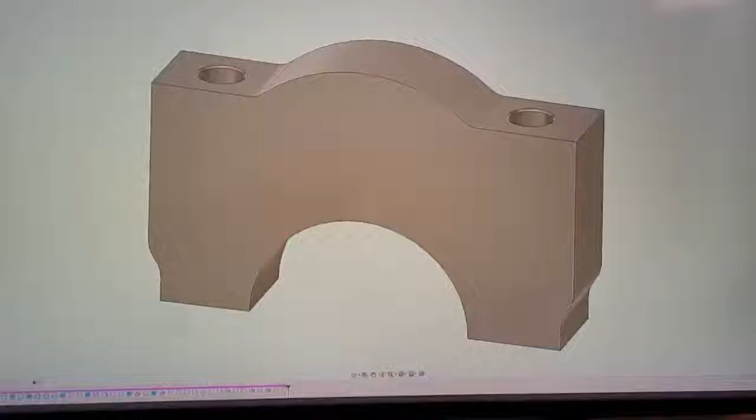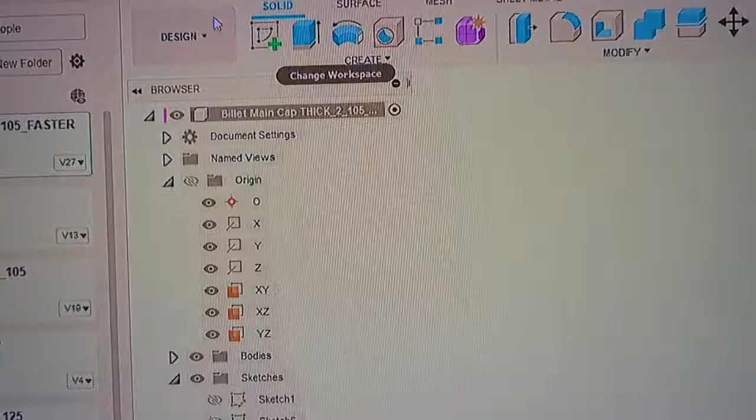Today I'm going to show you some more of how we're going to do the manufacturing. So I'd mentioned I use Fusion 360. Oh, little thing popped away. So in here, this is Fusion 360. When I go here, you'll see we have options. We can design, we can do manufacture. We're going back and forth between these two. So we'll come up with a good design and then we'll figure out how to manufacture it. So let me show you what that looks like.

Oh my God, why is this thing doing that? All right, I guess when it goes slow, it doesn't like it. I always do that quick and I don't.

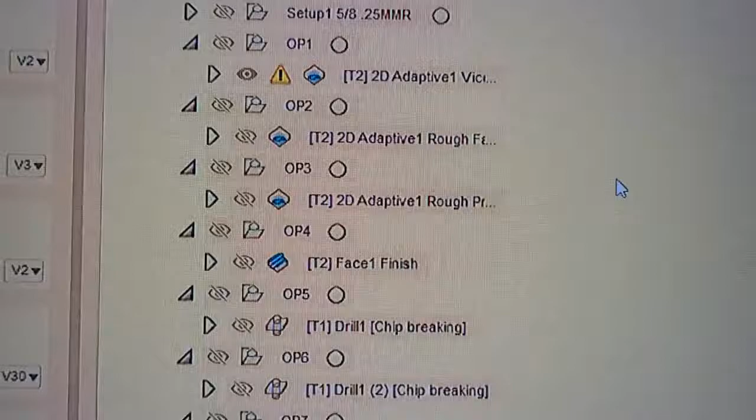Anyway, so this is what we ended up with. I'll show you. So it starts off, ignore some of that junk up there. So you see op 1, that's where our new stuff starts. We got 2, 3, 4, and then it goes all the way down to the very last one, which is 13. We did all kinds of stuff here that's new and better that I've never done before. So one of the big ones is, let me show you.

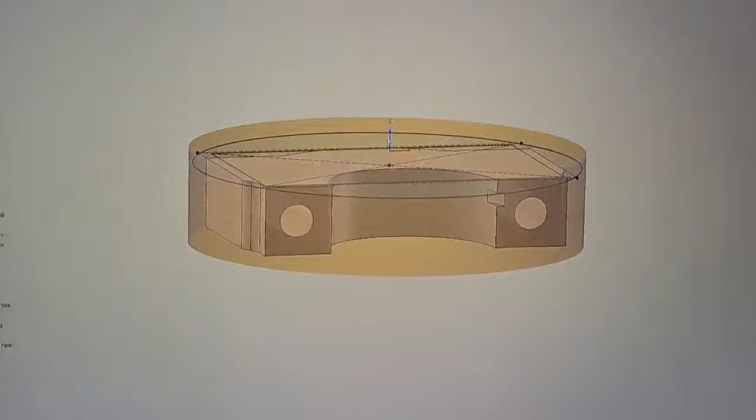I'm gonna go to op 1 and I'm gonna click it. And what you're going to see is there's a big round piece of metal. This is what we purchase. This is the metal as it comes. It's just a big round disc. It's like 5 inches in diameter and it's about 1.25 inches thick, roughly.

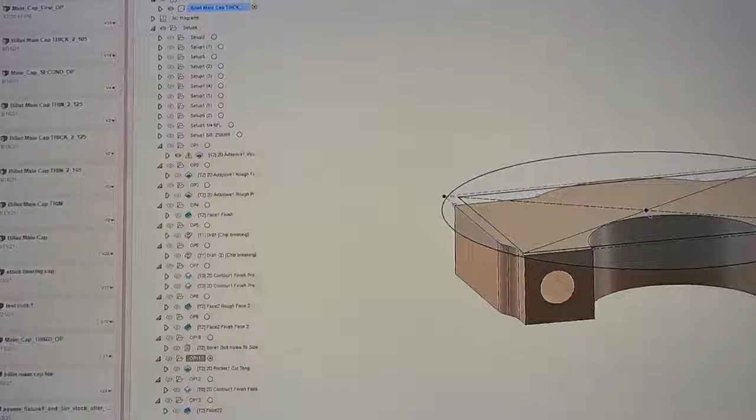Those are approximate numbers. So what you'll note is when I go to operation 2, look at this now. See how it still shows that round piece of metal, but now it's got a rectangle cut in it? I've never done this in Fusion, but what we did was we made it carry. When we go to op 2, it remembers, it starts with whatever was in op 1 and it sees that we cut some metal away and it uses that as the setup for op 2.

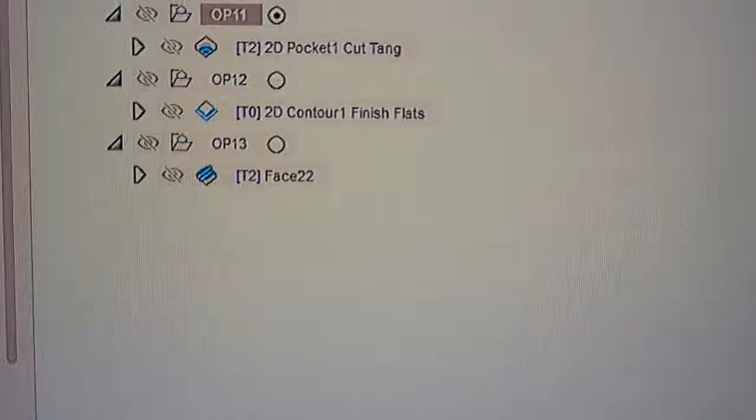And as you work your way down, when you get to op 3, it uses whatever has been accomplished for the operations above it and so forth. So by the time I get to the end, this is what I'm actually going to end up with. Now this might seem intuitive, people are watching this video going, well duh, of course you do it that way, but I've never done it this way. What I've always done is I would just have different setups, all based off of the same stock, or I would have different parts. Crazy stuff. And this is the first time I've ever done it this way.

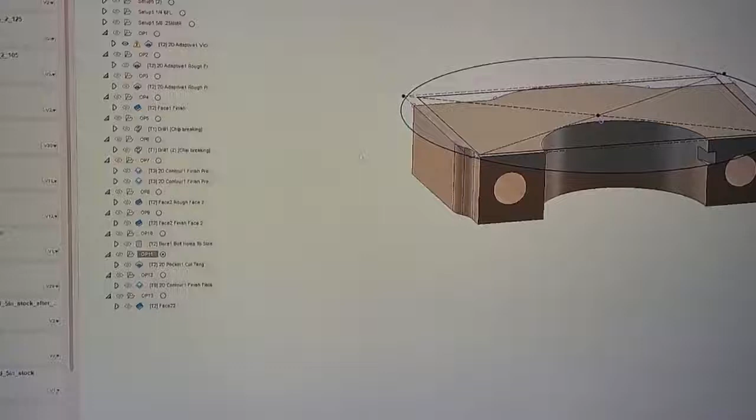I don't know how to stress how important this is. This is extremely important. And if you've never done this, or you don't make parts, it may not even seem obvious why this would matter. But what this means is that when I get down here to this last op, and you see what this part looks like, this is what it's actually going to look like. It's not assuming anything. If this is true, then this is what you'll end up with. That's why that's pretty cool.

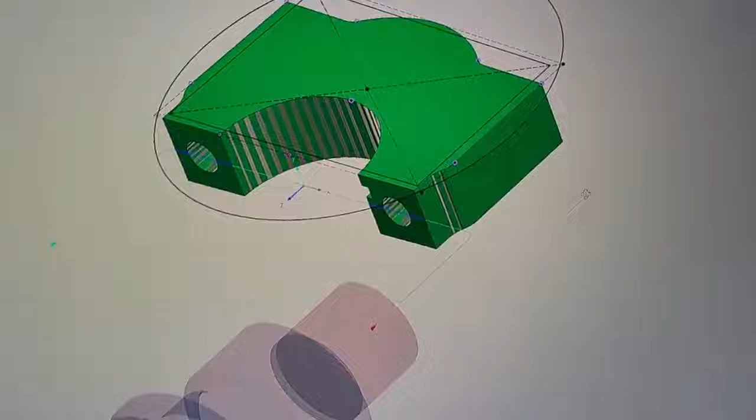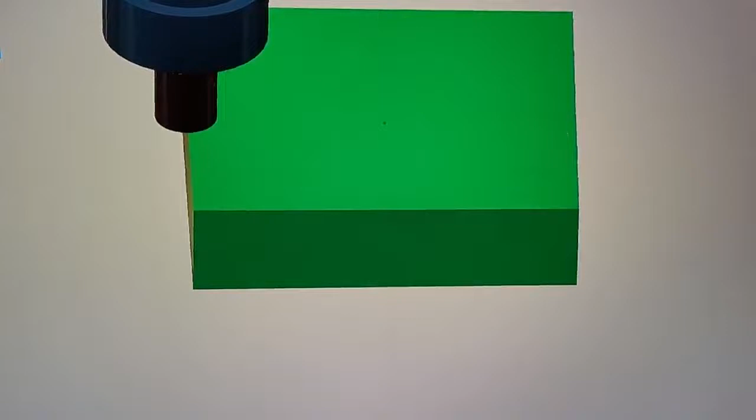So I'll show you. Anyway, here's our first operation. So we take that round piece of metal, and you can see all these blue lines. It just goes around and cuts a lot of that off, and you end up with this. I don't know if I've ever shown this on video, but this software can actually do simulations. Now, I don't know why the stock shows up as a square here. This software is just goofy sometimes, but I promise you it's actually a round piece of metal. But this is what it's going to do essentially on the machine. Little cutter is going to go around and follow its toolpath, and as you can see, it's cutting that rectangle.

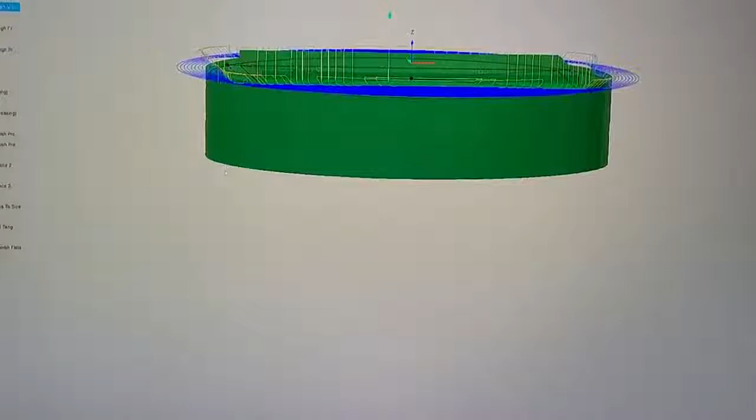There we go. And I'll show you some of the detail that went into this that may not be obvious now, but you ever heard that phrase, pay now or pay later? That's kind of how this stuff goes. The better of a job you do up front, the better your parts will be in the end. So you see this little radius? It's kind of hard to get to show up. You can see that's kind of curved. That's because our tool has a radius on it.

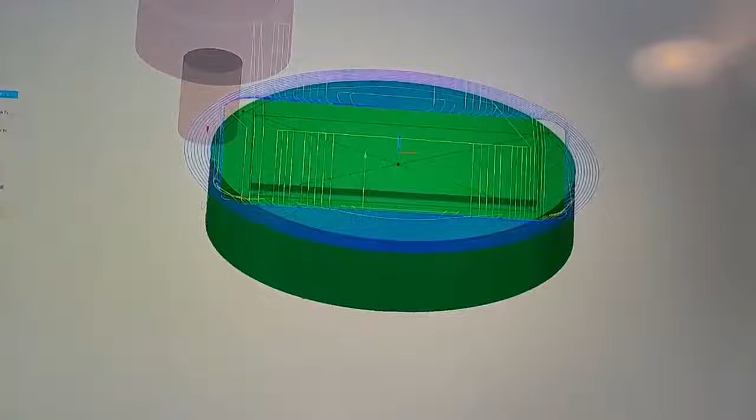This is the first time I've ever modeled that in software, put a radius on a tool, because either I don't use those tools, or if I do use them, I just ignore it. But that actually matters, and I've paid for this so many times in the past where something that I modeled, and then I went and machined it and it didn't turn out right because that radius somehow screwed me up.

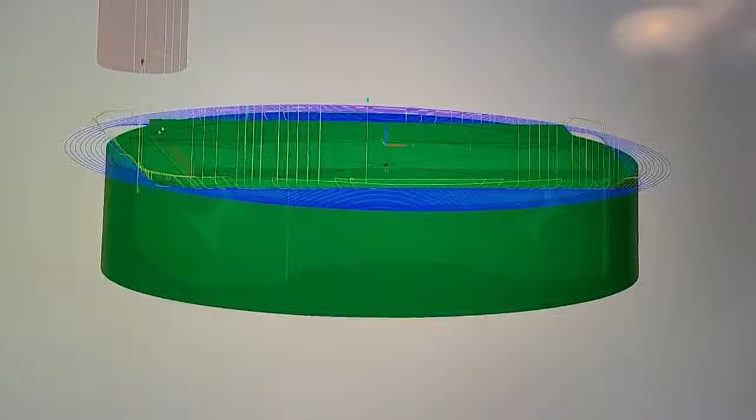So this time we put it in there, and sure enough, I've bumped into this issue several times where operations that look like they worked now don't work, and I'd have to go back and modify so you cut that metal off that the radius left behind. Again, there's like 1,000 little things that'll get you on this. So keep that in mind, guys.

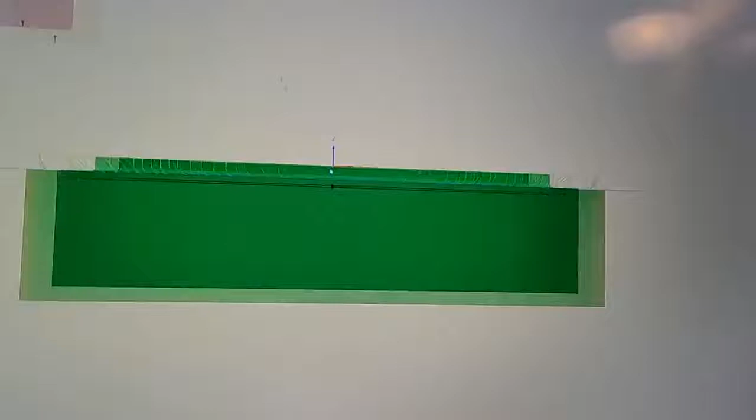I'm not really an expert at this. I'm kind of stumbling my way. You know, I do have some experience, but I am stumbling my way through some of this. It's a lot to take in. Not to mention the fact that, you know, I designed all this and I got to make it work on my machine. But yeah, we went through this step by step.

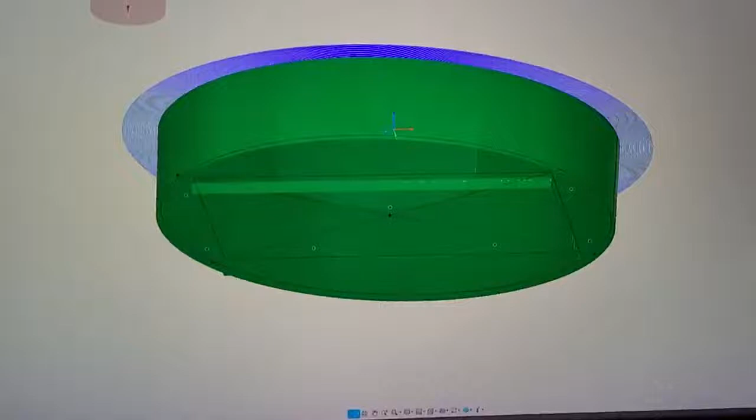So here's our second op. You can see everything's flipped. Now we're grabbing it in that rectangle. So basically, here's the bottom of the part. You can see that flange we just cut on there. That gets clamped down in a vise. And now you just got this round piece of metal poking up. And then essentially it just goes around in a circle and machines that whole face down to some level.

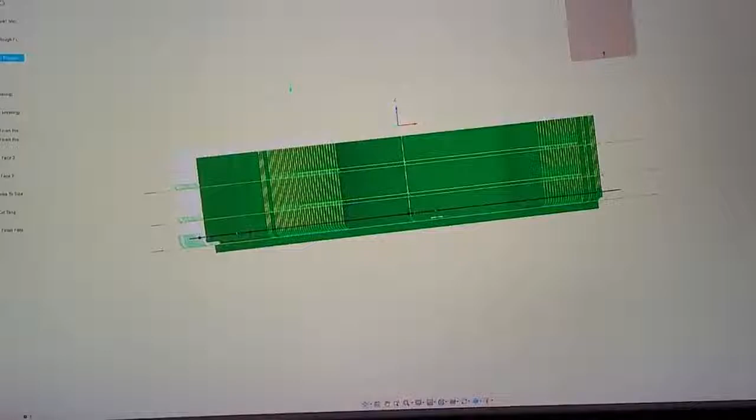Then the next operation, still clamped in the vise, it goes around and cuts this profile. And you can see here it's actually doing that in 3 stages. This was 4 stages for so long. It took a ton of optimization to figure out a way to get that to be done in 3 instead of 4. But hey, doing it in 3 instead of 4 makes it faster, and that's why we did it, but a lot of work. It's crazy. You just see this and you're like, oh yeah, whatever. But man, hours and hours, guys.

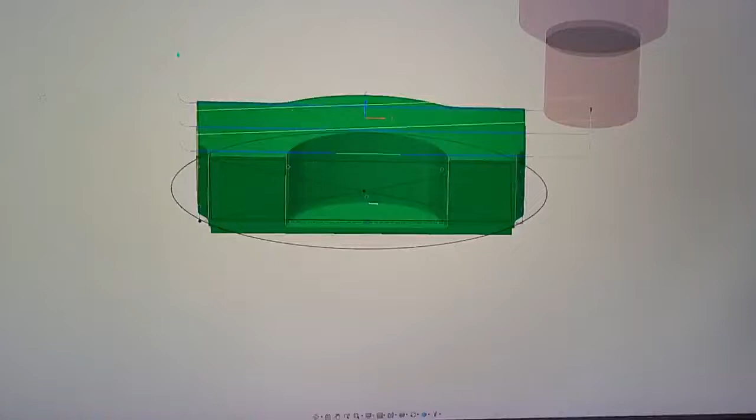Then we do a facing op. This brings this surface down to final size. So basically before, when we did our roughing, we got it pretty close, but we didn't get it all the way. And when we do the facing, that takes that last little skim coat off and gets it down to size. Then we've got some drilling operations.

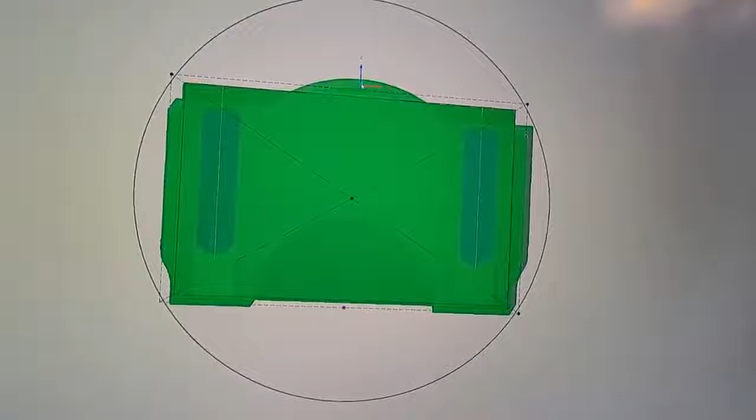You notice we keep changing this little thing. That's your datum, your XYZ. That's what's considered 0. I'll have a whole other discussion about that in a little bit. But you'll note every time I keep changing setups, you'll see that move. So in this operation, you can see some drill holes. We're just popping a hole there and there. And if you see, it doesn't even go all the way through. We're using a shorter drill bit.

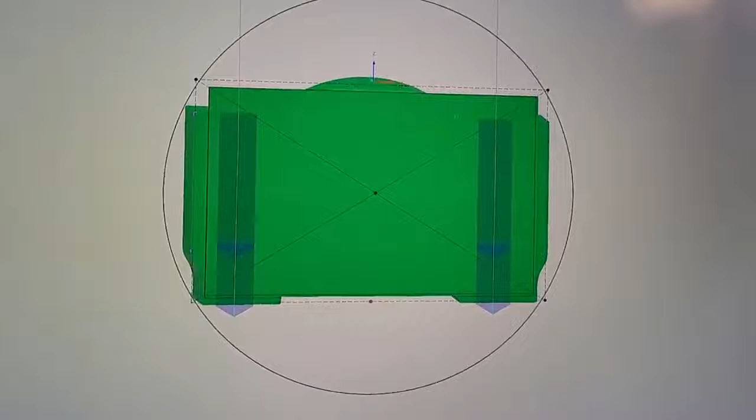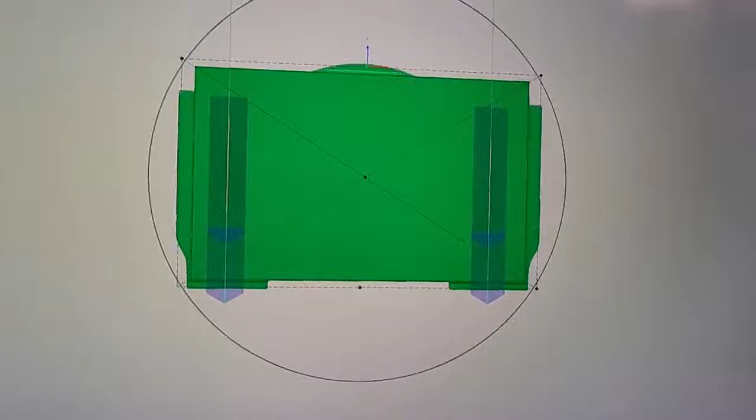Then our next operation, we come back and finish drilling it. And you'll note, this drill doesn't start at the top, it starts down here. If you look at our previous one, it's kind of hard to go back and forth, but see how it overlaps? So it starts drilling above the floor of the previous one. That way the bit doesn't crash into the bottom of the hole, but we also don't drill a bunch of air, so this saves time. So yeah, just little things like that. I've never done this before where I got a drill bit change and then jump in like that. So it's cool doing stuff like that, just speeds it up.

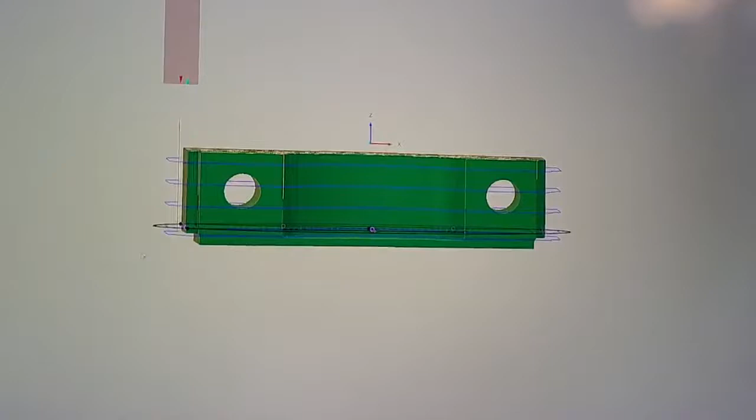Anyway, after that, got another change. Here's our part again. Now we're clamped up back on our flange, and we're going to do a contour. And what this does is it brings these surfaces down. It doesn't get them all the way to size. Actually, I better go check. Maybe it does. But that should get us really close. I got to go back and look at that. And after that's done, we got one more that comes through here, and this is what puts the final dimension on the outside. And this is one that kicked my butt.

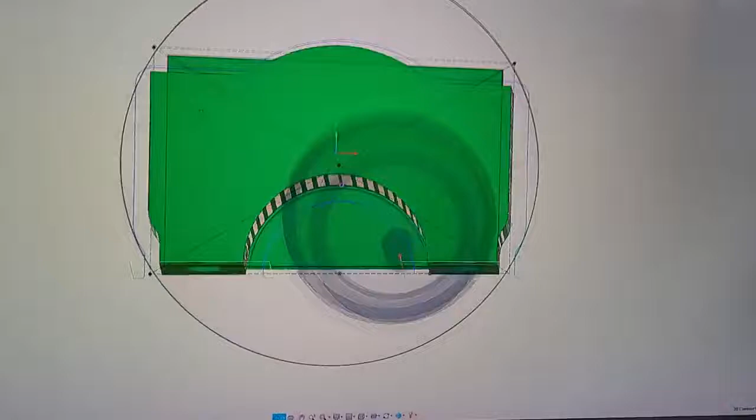The solution was simple, but I didn't know how to do it, and I fought this for a long time. But you'll note, if you look at these little blue lines, oh man, I need a pointer. Basically, you'll see blue lines like here, and they kind of follow up and over and so on. But what you note is they're not here, and they're not here. We're leaving that material on the part. We're going to go back and face that off towards the very end.

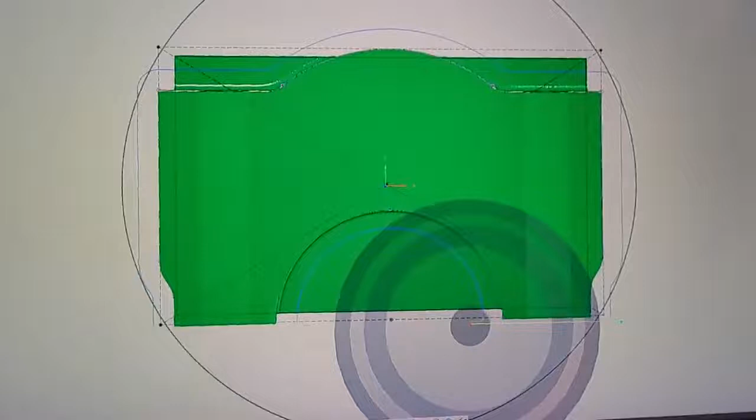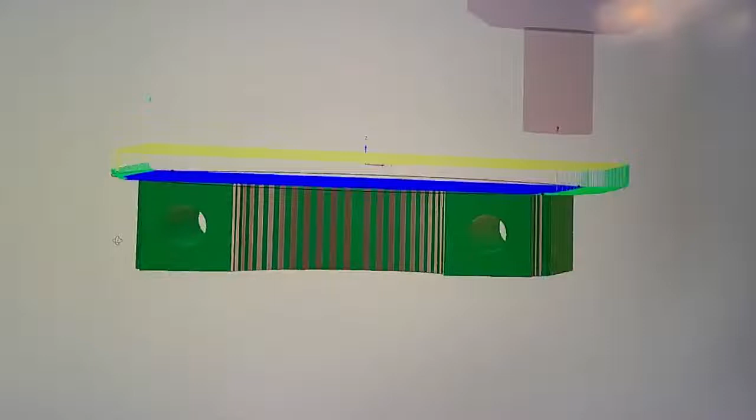Remember those last two steps? We cut our registers, and then we cut that face. So we're leaving that material on there now so that it's still there when we want to do that cut. So after this, we do another flip. Now we're in the vise this way. And you can see we're doing some roughing. This is taking off a lot of metal as well.

So we're actually deleting that flange. We machined that flange on there earlier. Now we're machining it off. That's what this operation is. So that puts us to our next operation. This is op 9. This is a facing operation. So that's putting a finished face on that. Then we've got operation 10. This is a big one.

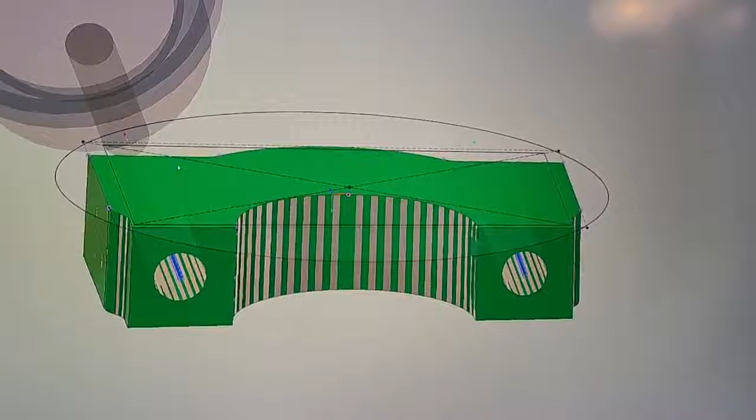So this is what is called a bore. So we already drilled these holes. You would think like, okay, cool, you drilled your holes, you're done, right? Well, no. One of the issues you run into on a CNC machine when you start drilling holes that are deep is your drill bit can walk on you. So essentially you're trying to drill the hole. Let me kind of give you an idea. Say this is it, and this is your drill bit.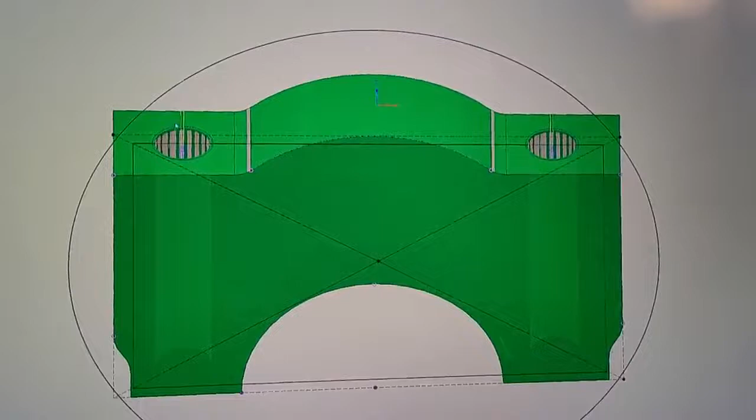Or what I did instead, I said, you know what? Let it drill the hole a little crooked. A little bit. So if I need this hole to be, say, within 5 thousandths, a brand new drill bit would probably do that. But maybe over time it wouldn't. But what's easier is to just say, drill it undersized. Let that drill bit walk 10 thousandths or whatever. It won't matter. Not actually 10, that'd be bad. But it can drift a few thou. And that's okay because we do this thing called a helical bore.

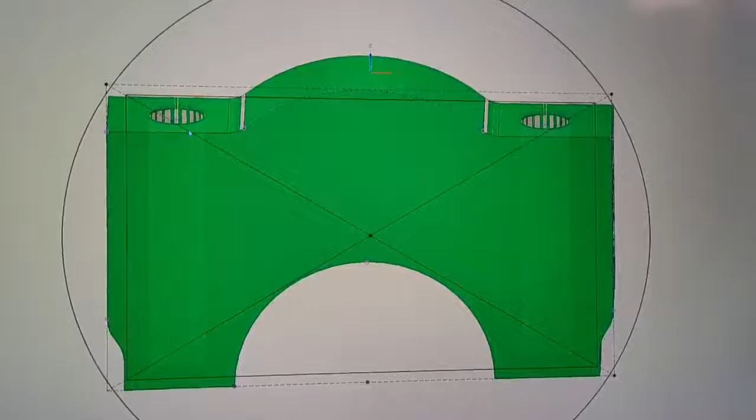So what this does, see this end mill? I'll zoom way out. See how ridiculously long this tool is? This is one of those extended length tools that is expensive. This allows us to go in here and use a mill and circularly go around and machine that part. I'll actually run this real quick so you can kind of see what I'm talking about.

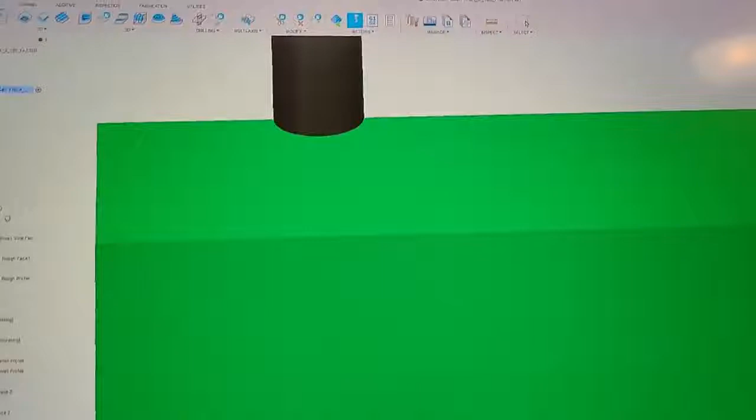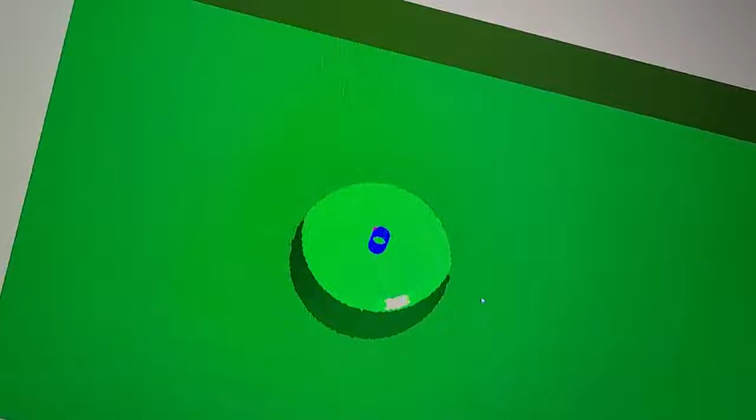So you can see, the stock's a little screwed up, so it doesn't look quite right. But see how this is doing? Hold on, let me try to bring it back a little. So what it's doing is it's just going around in a circle. Let's see. Yeah, you can kind of see there. It's basically just interpolating itself in through a hole, and that's what's setting the bore. Pretty cool little feature. Anyway, that should get our hole probably within 1 to 2 thou.

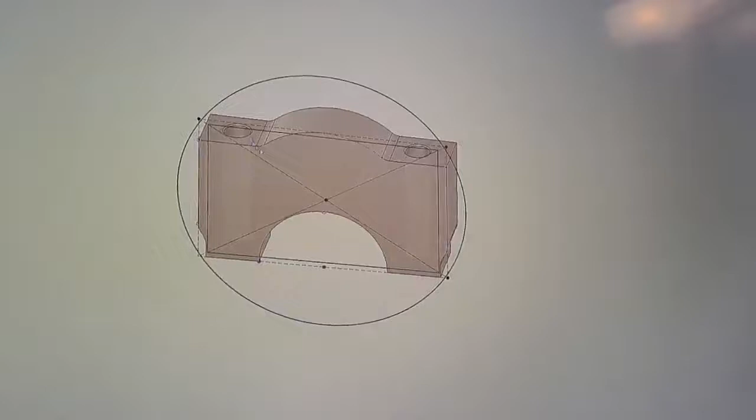We should have a circle that's not only the right size, but also positionally in the right location. And this is important for, say, a customer installing it. Typically anybody that buys this cap is going to be running aftermarket ARP studs, which, by the way, since these caps are so big, the typical aftermarket studs don't fit, but no worry, I've already contacted ARP and I've got part numbers for ARP studs that do fit.

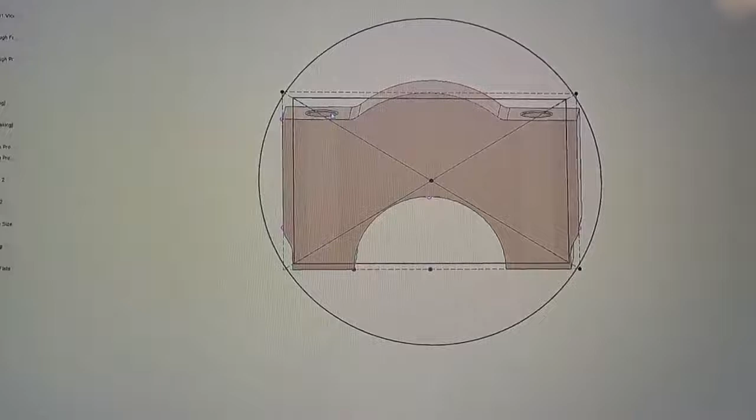So anyway, when you're installing your studs, you screw those in the block first. If these holes were a little crooked, then when you go to put your caps on, they might rub, or you might have to hit them with a hammer to get them to slide down the studs. And we don't want any of that. So we're trying to get these holes perfectly straight. You know, I'd rather this be a little higher quality than necessary than be a little short on quality.

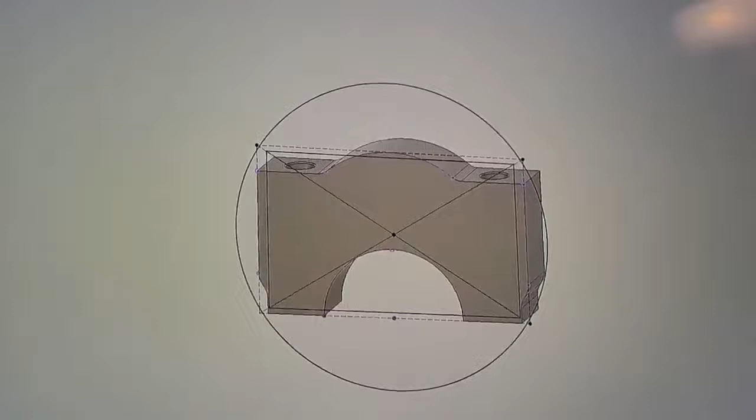So by doing it this way with the carbide, even if our drill bits drill a little crooked, it won't matter, because when we come in and do that op, it'll fix it. So that's cool. You know, the downside is it takes 3 ops to put that hole in there, but the upside is this should be very consistent. I should be able to make 100 of these caps, and every one will have the holes in the right location with high accuracy. So here's our next operation.

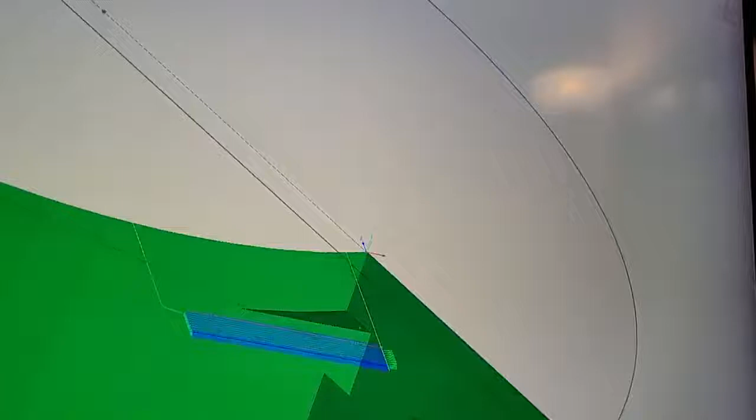We got another one of these crazy tools. This could be one of the hardest operations to do. Look what this looks like. If you zoom out, you can see our tool has an absolutely ridiculous length to diameter ratio. This thing's poking out about 15 or 20 times its diameter. So that's kind of a flimsy tool, hard to use, and we're cutting 4140, so it sucks all the way around. And we're doing slotting, which is about the worst thing you can do.

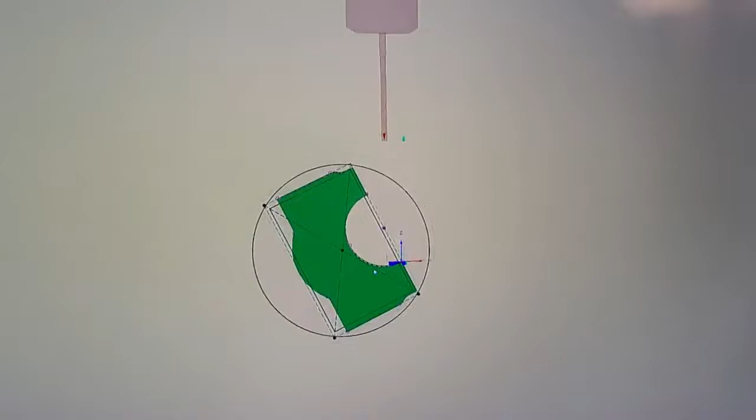We don't know if this part's going to work, but this is what we're doing. And you can see here we got a bunch of little tiny passes. Each one steps down a little bit at a time, and we're hoping, you know, we've never done this. We definitely got to test this out, but we're hoping that works. And you can see we got to get the part clamped all crooked so that the end mill comes down straight. And what's funny is I did not realize how hard this tang was going to be to machine, because if you buy a traditional end mill and you try to make this, your tool just runs into the part, which is basically worthless.

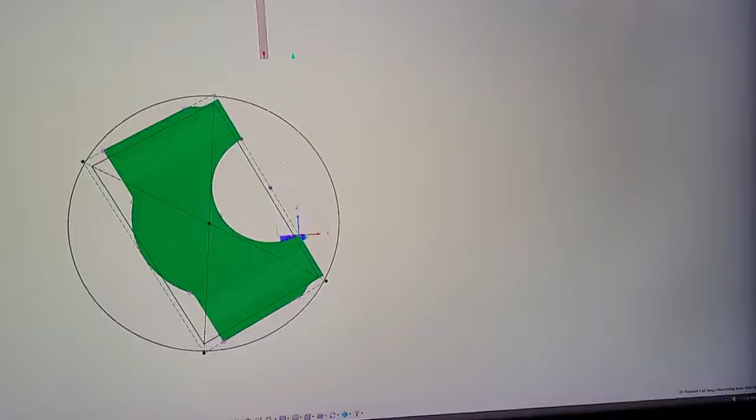Yeah, I don't know why the simulation's all screwed up right now. Oh well, I'd show you that, but I probably need to restart Fusion. It's one of those softwares where you got to reboot it sometimes. But anyway, we got that sucker in there. It cuts our tang.

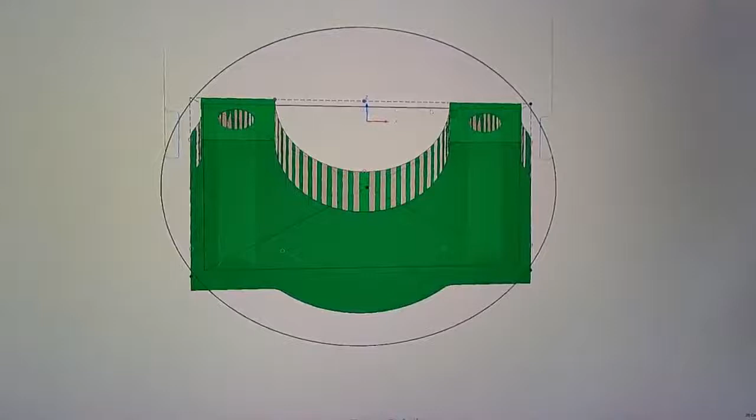Let's see. Next, we're down to the last 2 operations. There we go. So our part goes in the vise like this. And you can see we just got 2 ops. We go on this side and we go on that side. And that sets our final distance on the flats. And if you look in the tool holder, you'll note how stubby that tool is. That's for rigidity, like we had talked about. And then after that, we do a facing op. There it is, big indexable, just flies across the face, faces that off to its final distance.

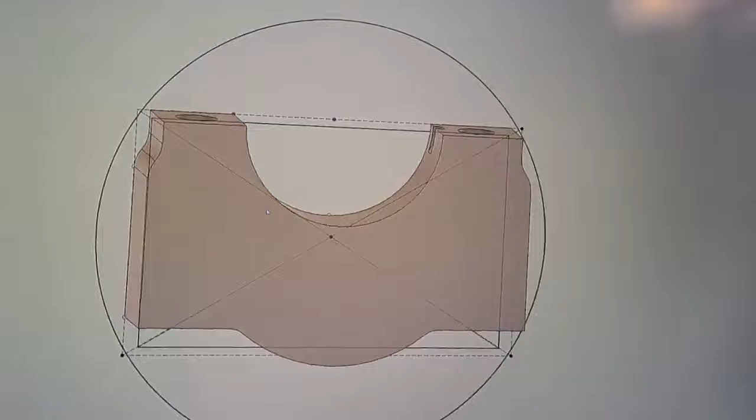And that's a part. Now, like I said, I know I'm still missing a couple things. You'll note here, this has a sharp corner. I think we're going to throw a chamfer on that for the final product. So I have to deal with that. That'll be fun. Maybe another op, I don't know, we'll see. But I'm probably going to throw a chamfer on that. I think that's a good idea.

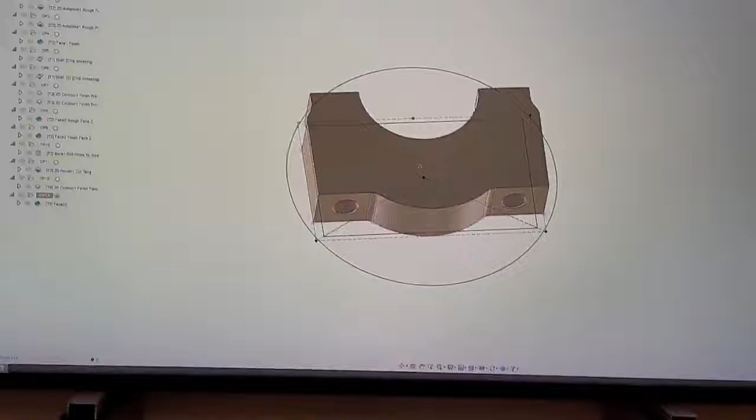But yeah, this is what we've been working on. Like I said, a lot of time and effort went into this. This stuff is not easy. It certainly isn't easy for me. I'll tell you what, to me, this is like micro manufacturing, trying to be able to do this kind of stuff independently. And man, it's tough. A lot of work goes into this. But if y'all ever want to get into this stuff, don't be afraid to jump in and try it. But yeah, there's a learning curve.

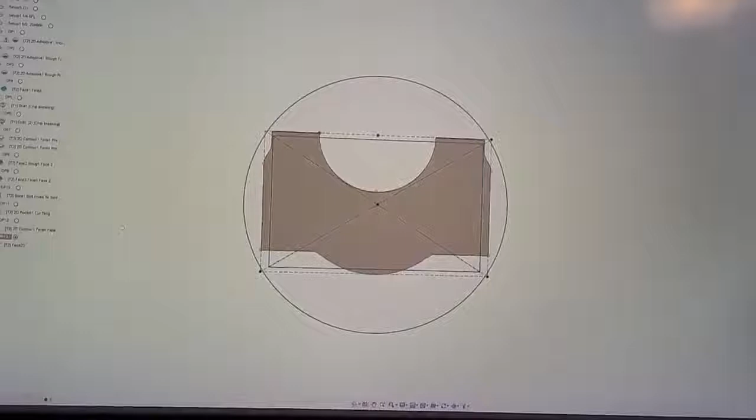Although I can say, if you're going to do this, the Fusion 360 program is pretty sweet. Being able to jump back and forth from design to CAM really kind of speeds things up. So yeah, I guess I'm going to jump into another part of the video and show y'all that.